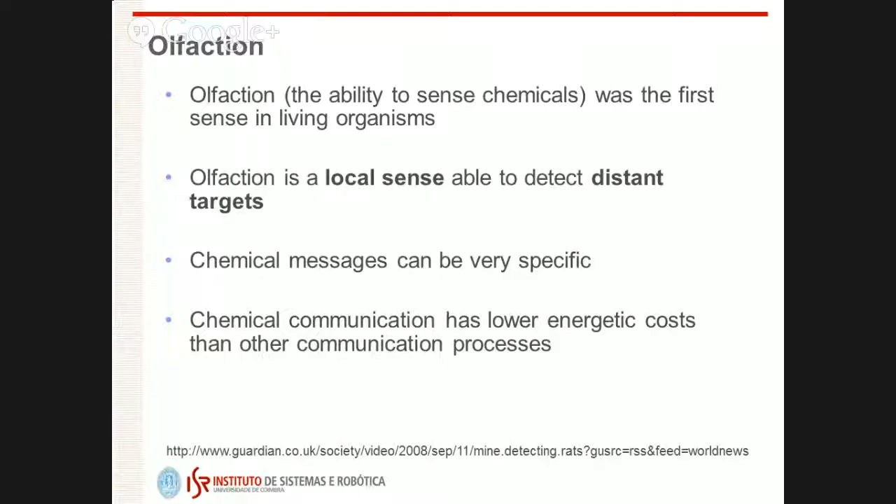Even in mating, usually the female generates some kind of pheromone to attract other animals from the same species in order to get together. In fact, chemical communication is one of the least energetically expensive processes to communicate in the animal world. We humans communicate a lot using voice, using sounds, but most animals don't use sounds to communicate. So a lot of communication is made by sending chemical messages.

Thinking about again, or focusing again on why use robots with olfaction. If we think about how humans use other animals to help them in terms of olfaction, everybody has passed through an airport and has seen dogs smelling and so on. The fact is that our sense of smell is not so well developed nowadays because we evolved in a different direction. We don't rely so much on the sense of smell right now. But when we need advanced smelling capabilities, we frequently use other animals that can somehow help us. Using dogs, that's an example.

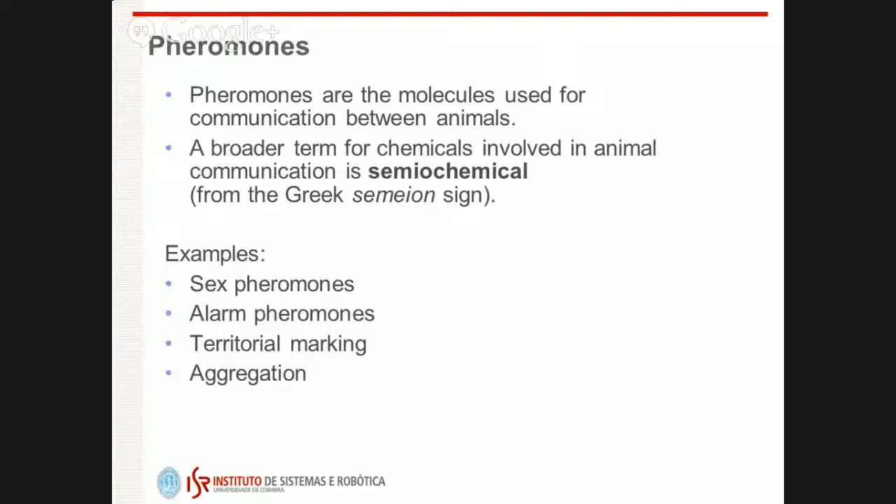So, thinking about some details about olfaction, something that probably some of you never heard about are pheromones. Pheromones are chemicals that are used by a species to send messages to individuals of the same species. There are sex pheromones, alarm pheromones, territorial marking pheromones, pheromones used for aggregation, and so on. So there are a lot of different types of pheromones. We can see some examples using pheromones.

For instance, a female moth releases some pheromones that are transported by the wind and eventually captured by a male that tries to follow the plume generated by the released pheromones in order to reach the female. This silkworm moth species is a very well studied species in terms of mobile robotics olfaction and olfaction in general. In fact, the first pheromone to be synthesized was one from this silkworm moth in the late 50s.

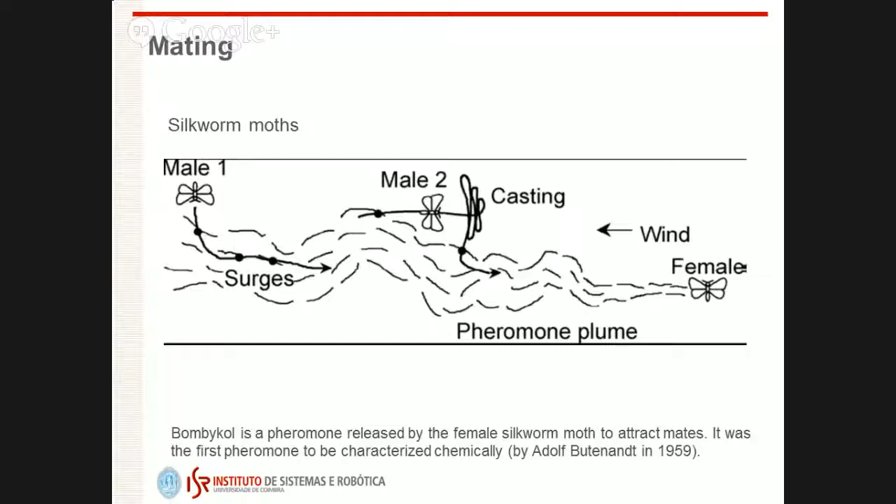And also the behavior of these moths, how they manage to reach the female, in terms of algorithmic aspects, has been a topic of intensive research during past years, because it is reported that the male may detect a female at more than 1 kilometer away. If you think about the size of a moth, and the quantity of molecules that are released, it's really impressive how it is possible to sense those molecules and track a plume for more than 1 kilometer. 1 kilometer, you use miles, that's okay. In fact, literature reports 1.4, so it's almost 1 mile. That's really impressive.

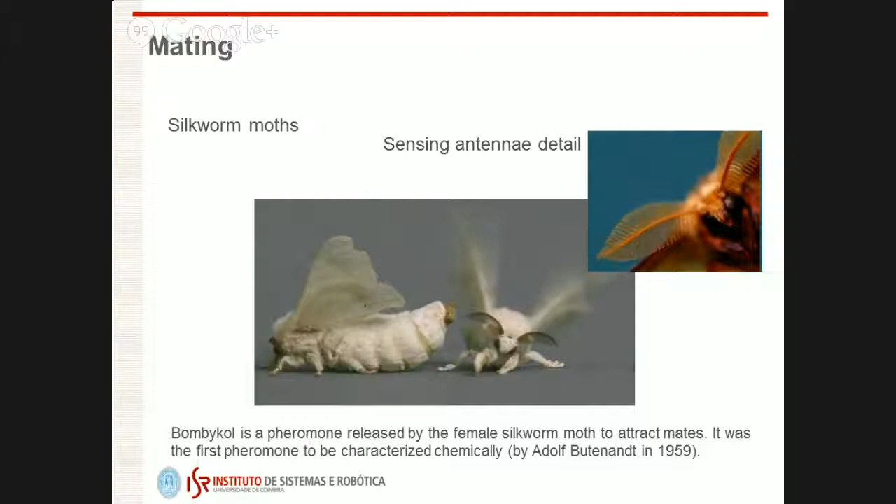Those silkworm moths have this shape, and they sense the pheromones using these antennas. Here we can see a close-up of these antennas, and it is claimed that the filaments of those antennas are able to sense even 1 molecule of pheromone. So if 1 molecule passes through, it can be detected, which is really, really impressive. There are no artificial systems that can do that right now.

There are also a lot of animals that use olfaction to search for food. Actually, most animals use olfaction to search for food. What we can see here are images from a study done in Berkeley some years ago, where the behavior of a dog was tracked with LEDs. Here, I don't remember the name of this bird, but this bird was releasing a scent, and the dog was somehow tracking that scent. And what we can see is that although the scent is transported in a more or less linear way, the dogs employ a strategy to track that scent, allowing for some robustness if the scent goes away.

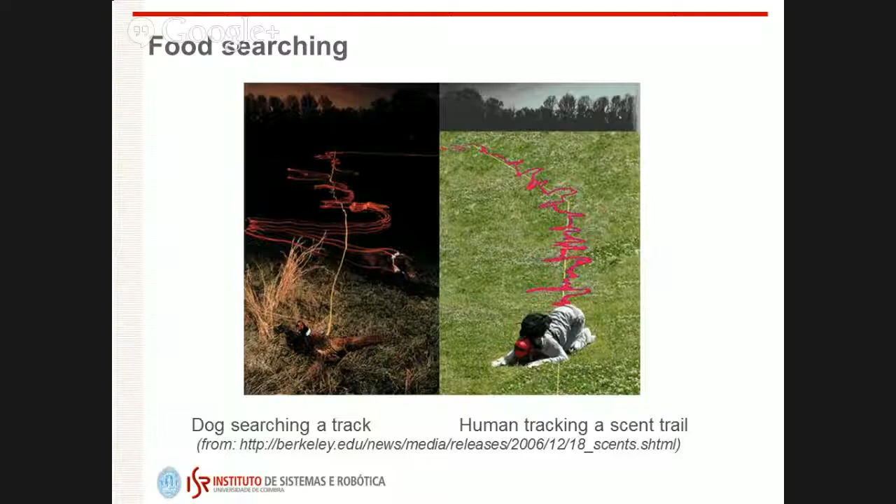What was done was comparing the behavior of a dog in this study with the behavior of a human. In that experiment, I think a chocolate scent track was laid on the ground, and a group of persons with their eyes covered were asked to try to track the scent. And what was impressive was that persons who are not trained to track scents employed more or less similar strategies. It's a strategy where the person or the animal accounts for the possibility of losing the track, a kind of differential tracking strategy in order to not lose the track.

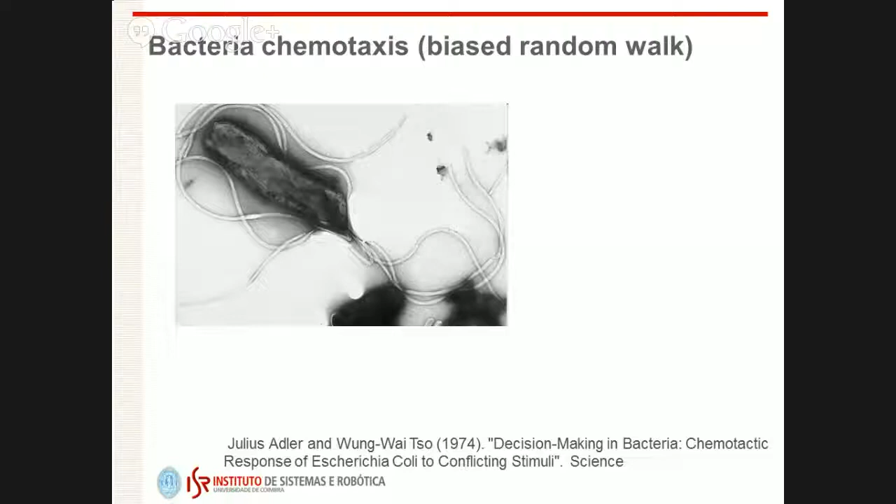Another very well-known example in terms of chemical-related behaviors are bacteria in general. In the 70s, a lot of studies were done with E. coli and other bacteria, and it was concluded that those bacteria could follow a chemical gradient using a very basic algorithm that was called biased random walk.

The idea of the algorithm was basically that the bacterium stores the previous chemical concentration measured and does a move. If after this move the chemical concentration increased, the next move will be more or less in the same direction. If it decreased, the bacterium performs what's called a tumble, so it goes somewhat randomly, but in the reverse direction.

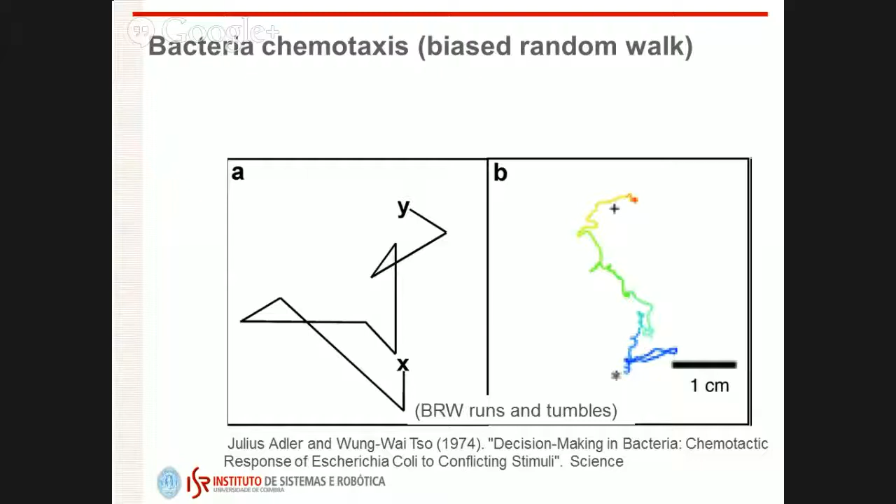What can be proved is that this type of biased random walk somehow allows to follow gradients with this very basic algorithm that only requires one memory cell, let's say. So it only requires storing the previous concentration value and knowing more or less the direction of motion, or at least knowing that I'm moving either in the prior direction or in a different direction from the prior one.

Okay, I'll try to move a bit faster.

Another example of animals using scents are bees. Bees, as you know, visit flowers for pollen. So in order to optimize this process, when a bee visits a flower, she marks the flower with a scent to know that that flower was recently visited. As you know, scents evaporate, so in time they disappear. If another bee visits that flower, it immediately detects that the flower was recently visited, so it goes away because that flower has no pollen.

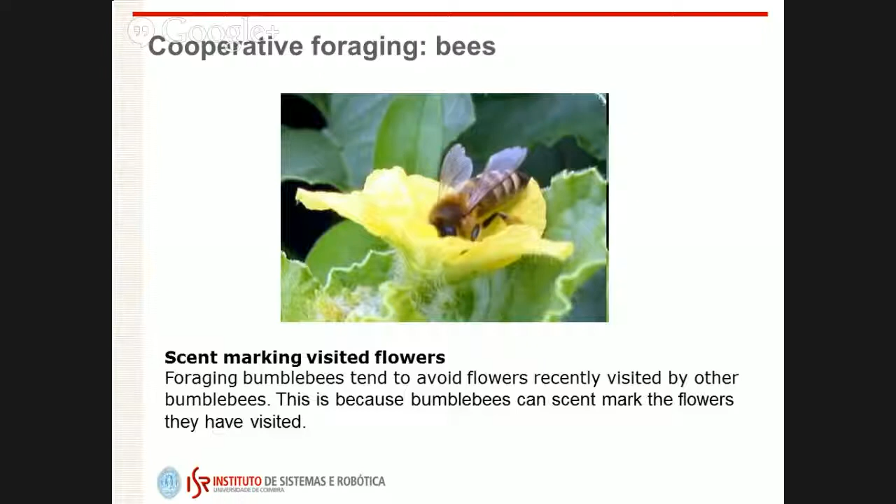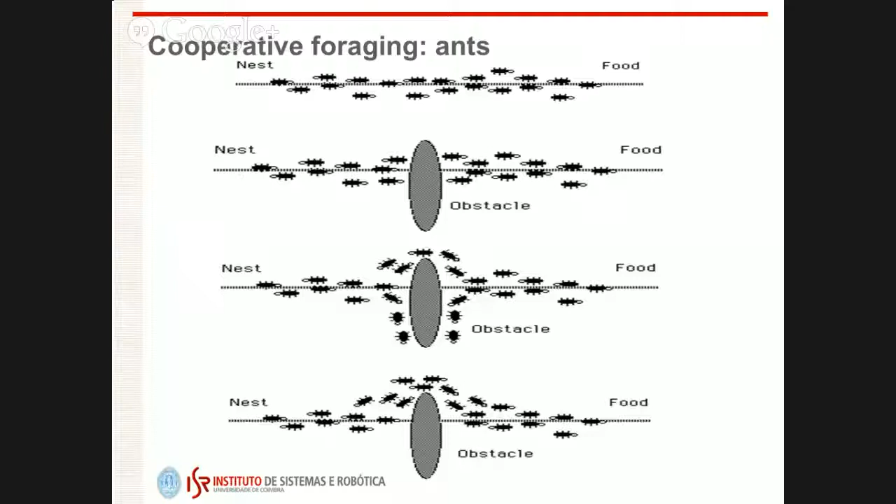The mark released there disappears with time, and when the mark has disappeared, the flower contains pollen again, so that's a kind of distributed optimization process that emerged from this use of odors. Ants are well known to use scents for a lot of their tasks, including to mark trails and to optimize trails from a given origin to the target.

Scents are also used, for instance, by territorial animals to mark the territory. That's also a way of distributed coordination among communities, in this case to manage competition among the animals of the same species.

So after this number of examples, let's try to wrap up what we have seen and think about, in terms of robotics, what can we use scents for? In summary, we can use scents either to go to a scent source or to avoid that source. Actually, there was a Greek philosopher, Plato, who claimed that there are two types of scents: the attractive ones and the unattractive ones. If we stick to that, we can think of using scents in robots either to let the robots find a given source of the scent, or to avoid it.

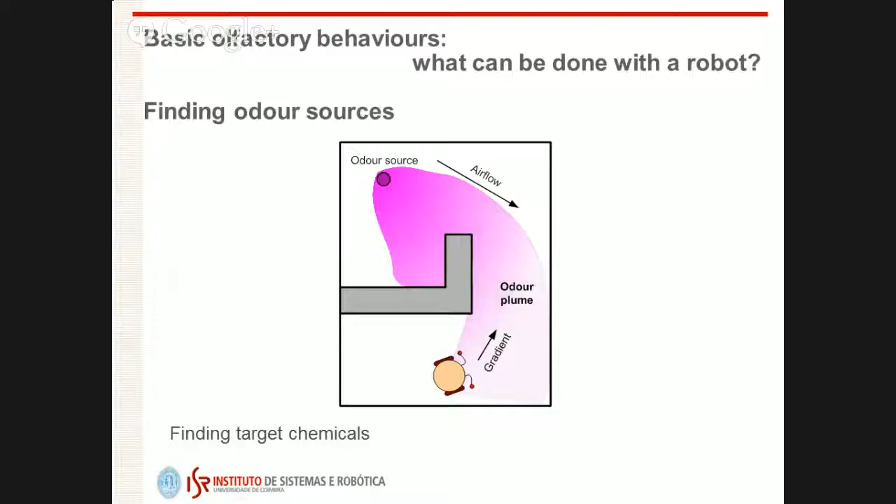We can use scents, for instance, to coordinate robots along trails. So instead of using localization and so on, we can just mark the trail. For instance, if we have a patrolling task, imagine that we want to patrol this building with a group of robots. If the robots mark the places where they have been with a volatile scent, when another robot passes in a given area, like with the bees, the robot knows whether that area was recently visited or not.

So if it was not recently visited, that's a self-coordination mechanism that may be used to have distributed patrolling without a centralized mechanism to coordinate that patrolling, or to transport things along trails. That's another example. Or we can think in terms of repulsive smell.

Imagine that we want to clean a large area, let's say an airport, using groups of robots. If the robots can smell the cleaned area by the chemicals released, and find the not so recently cleaned area, that's a mechanism again that can be used for automatic coverage without any kind of localization and so on.

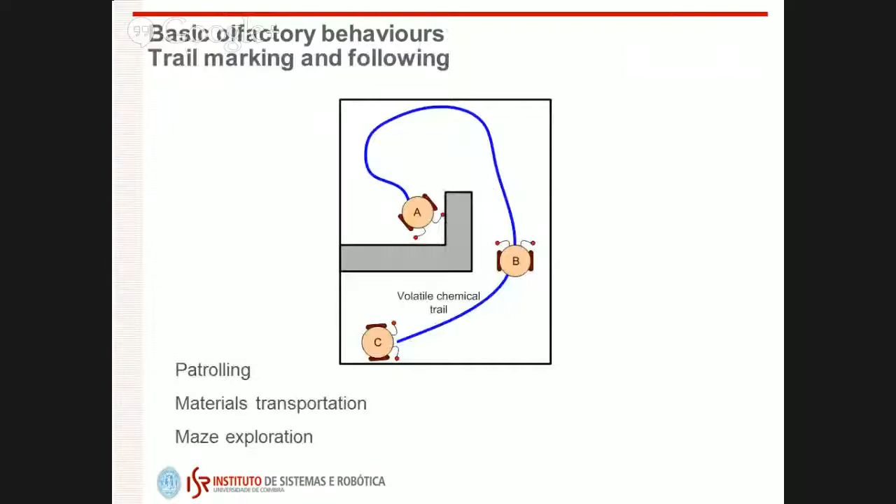So I'm assuming that everybody knows a bit about robotics. I don't know if you are aware that one of the problems in robotics is that robots usually need to self-localize. A basic problem in robotics is the navigation problem, how to move from one point to another point. And so those things try, using smell, to address those problems, but in a non-conventional way.

Okay, to use smell in robots in an effective way, we need to know deeply how odors are transported, if we think of the atmosphere, by the atmosphere. Basically, we can think of two mediums, either atmosphere or aquatic mediums. So let's not complicate too much and focus just on the atmosphere. As you can see from this cigar releasing smoke, the mechanisms of odor transport are not easy mechanisms.

Smoke from the cigar, it's not a smooth plume. It's a very turbulent one that has some laminar regime here, and immediately starts bursting, and we'll have areas with very different concentrations. In fact, if we think of another patch in what's called a low Reynolds environment, so something very viscous, the main phenomenon that happens with that concentration is spreading slowly, in a diffusion-only manner, and this would generate smooth gradients.

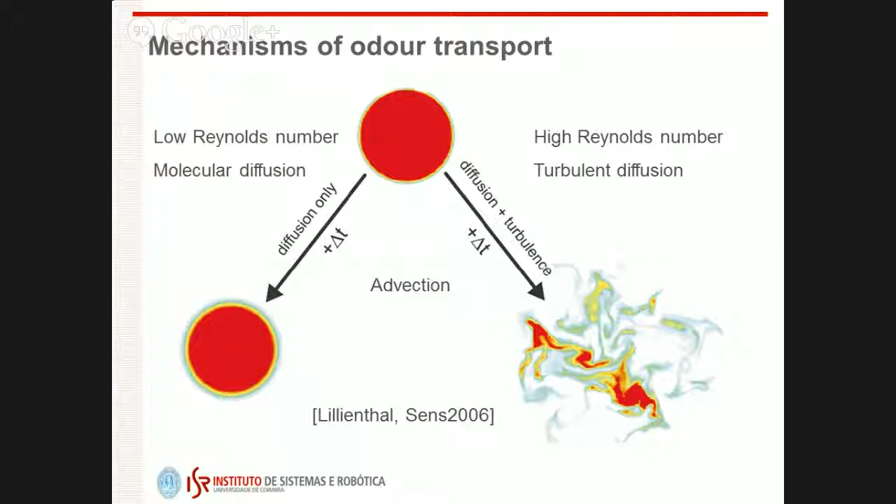So this difficulty makes dealing with odors and smells very hard. Let's try to analyze what is called an odor plume: the release of a chemical that is transported by the wind. If we look at the average of that phenomenon, that average can be modeled by what's called a Gaussian plume that provides this smooth pattern in terms of concentration.

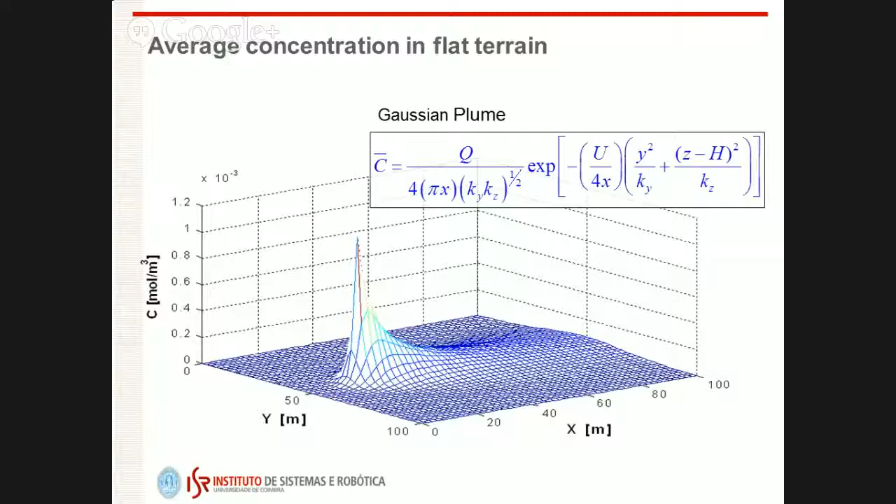But I'm saying again that smooth concentration is an average. So imagine that you have a gas release or a chimney that's releasing some chemicals. What that represents is, for instance, a half-hour average of what happened there, not the instantaneous phenomenon. If we try to look at a not so long-term scale, we'll obtain something like this. Imagine that you are above the plume looking at it. The wind generates that kind of fluctuation that represents the plume better, but doesn't represent everything yet.

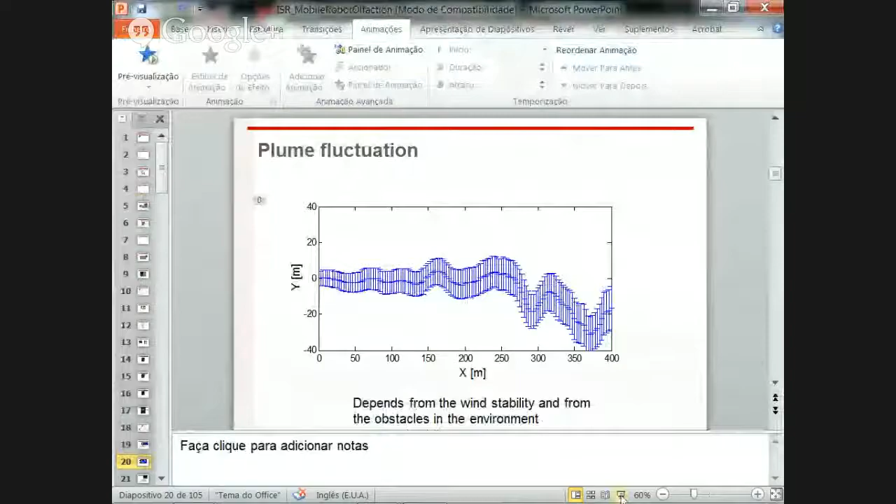If we really want to go into detail, the inside of the plume is very, very complex, and this is bad, but it's also good. It's bad because the phenomenon is very complex. It's also good. I don't know if you guess why. Why do you think it's also good? I'll tell you. It has to do with that average, and with why the male moth is able to detect the female 1 kilometer away or so.

The point is, due to turbulent diffusion, inside the ever smaller patches of odor, the concentration is more or less similar to the concentration at the release point. We are shredding and shredding those patches. So this is good because if I sense, for instance, here, I'll obtain a very high concentration, and so the probability of detecting that molecule is high, even far away. But because of its nature, it's almost chaotic, and so we have to deal with that.

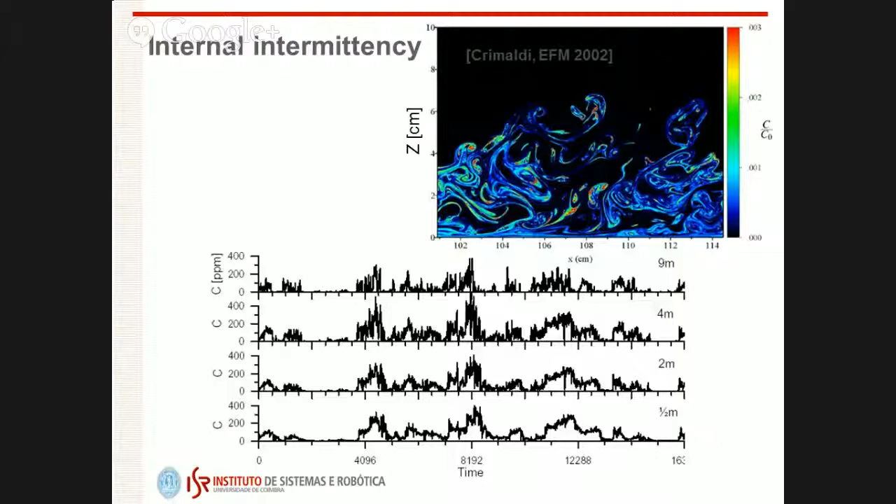So the trick that we would like to explore is exploiting concentration peaks instead of the average, because this phenomenon on average may be almost zero, but it's reported that the peaks might be 3 orders of magnitude higher than the average.

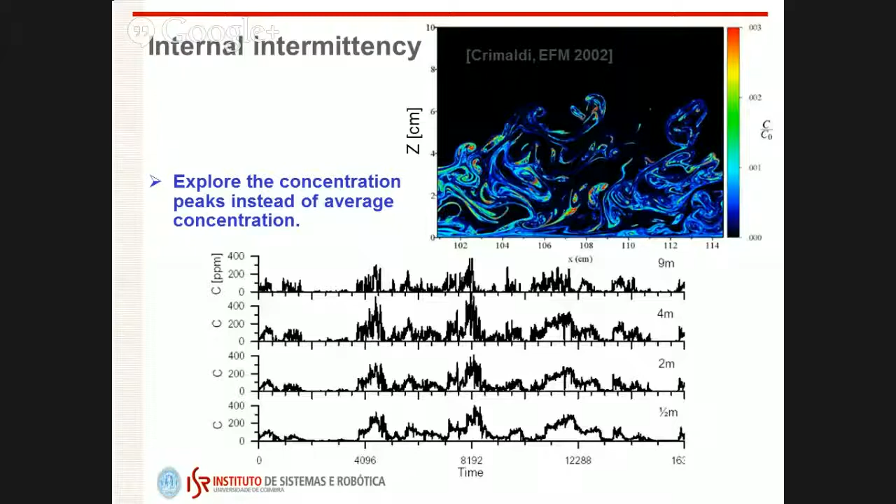So I'll go very, very fast on these artificial olfactory systems, since mostly being computer science it makes no sense to go into detail about technologies, but there are a lot of technologies to sense gases. The ones mostly used in robotics are the second one there, metal oxide gas sensors. Those metal oxide gas sensors are resistors that change their resistance in the presence of a given chemical.

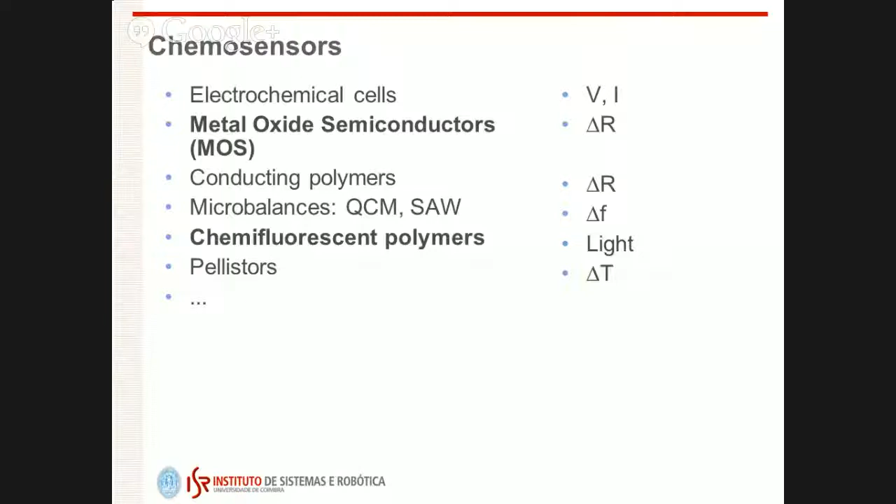So I won't go into details with this, but you are okay. If you have interest, please, let's try to not be a one-way talk. I'm happy to be interrupted, and let's try to interact if you need. Okay, so if you are curious about details of gas sensors, I can say a bit about that.

Okay, gas sensors have several problems. One is that they are not as selective as the biological ones.

I told you about pheromones and chemical messages. In fact, in biology, animals are very, very selective in terms of sensing. They know exactly that type of molecule: it's a pheromone from my species, no doubt. In artificial systems, that usually doesn't happen. Almost all of those chemical sensing technologies that were reported or presented before are selective to a given chemical, but also to a lot of other chemicals more or less similar.

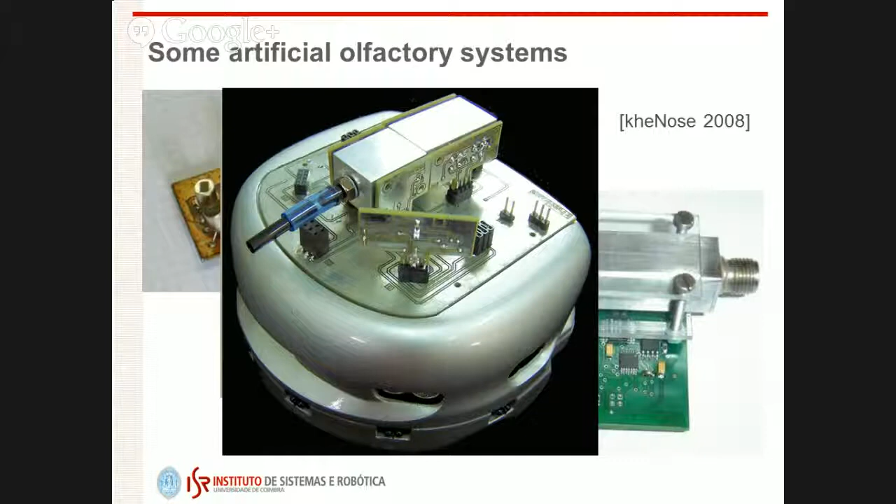As you can imagine, it's not only important to identify the smell. If we want to do something using smells on robots, what do you think is also fundamental? Sorry? To emit a smell? To give off a smell? That is important, yes, depending on what you're doing, for some. But I mean about combining the sense of smell.

In fact, let's say that you sense smoke, how do you search for that smoke? Okay, smoke is visible, maybe it's not a good example. Perfume. If you have two noses, you're trying to locate the source, right? Exactly, which one is getting it. That would be the obvious approach that I did a long time ago, and it's not very good. And that's why we have two nostrils, right?

I'm not so sure about that. In fact, we are symmetrical animals. We have two eyes, and we can benefit from the two eyes in terms of stereo and so on. From the two nostrils, I'm not sure that we can benefit in terms of stereo. In fact, probably I would go upwind. I would try to know where the wind is coming from and go there, because I know that smell is transported by the wind.

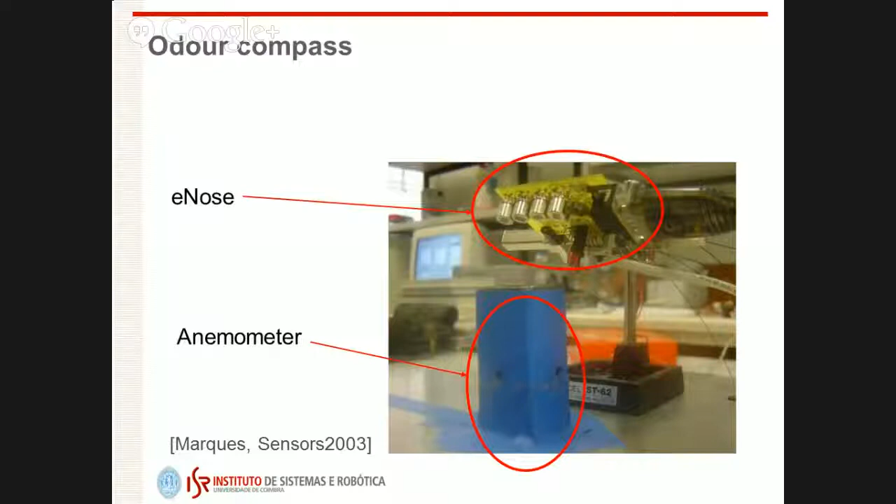We have two nostrils, but it might be just because we evolved as symmetrical animals, or it's more robust: if for some reason you lack one nostril, the other one might be working. I don't know. But the fact is that using only the nose, or exploring stereo from the nose, is really, really hard, if working at all. The point is we realized that we need to combine also the sense of wind. We need to know where the wind is coming from and combine both types of information in order to have some kind of useful output.

So some years ago we combined both. This is what is called an odour compass, something that is able to classify odors and know also where the odors are coming from. This is an experiment with a ventilator with a cup with a volatile in front of it, another white ventilator on the top of the lab, and the system in the middle. The experiment consists in turning on one ventilator with a chemical, and the system identifying which chemical and direction, then switching off, switching on the other one, and being able to discriminate odors and where they were coming from.

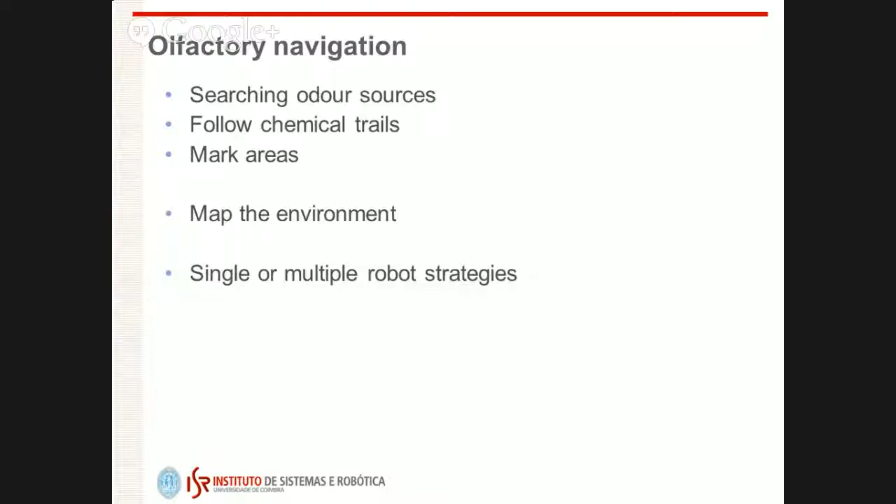Okay, this is an overview of the possible navigation tasks that we may explore. There are several possible tasks that I already mentioned, like searching for odor sources, following chemical trails, marking areas, mapping an environment, and so on. And we can explore this with a single robot or in multi-robot environments. One of the reasons why I'm interested in using smell is also to explore coordination strategies, so multi-robot environments coordinated somehow by smell.

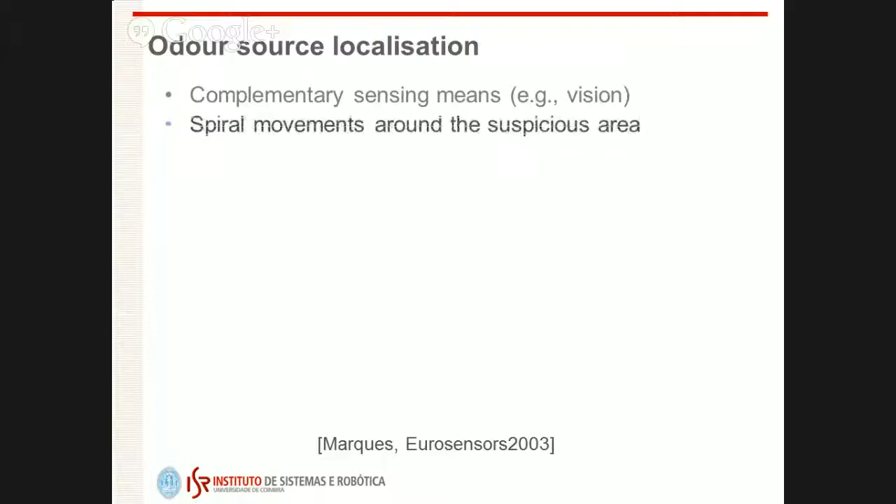So let's see something about odor source localization. So if I want to search for an odor source, basically we can say that I need to do three things. First one is detecting the chemical. If I'm looking for an odor source, let's suppose that I'm looking for fire in this building, first I need to get some signs of smoke. So as far as there are no signs, I should keep looking. So this is basically the first task related with this mission, and the goal here is getting into contact with the molecules that we are looking for.

The second: let's assume that in a given corridor I smelled some smoke. What I need to do is track that smoke scent until its source. So that's the most obvious thing to do. And to do that, I need to do what is called plume tracking. And let's assume instead of smoke, that's a non-visible chemical, let's say benzene or propane. So that's a non-visible chemical that we can sense. So that gas that is used to cook, for instance, we can sense and it's not visible.

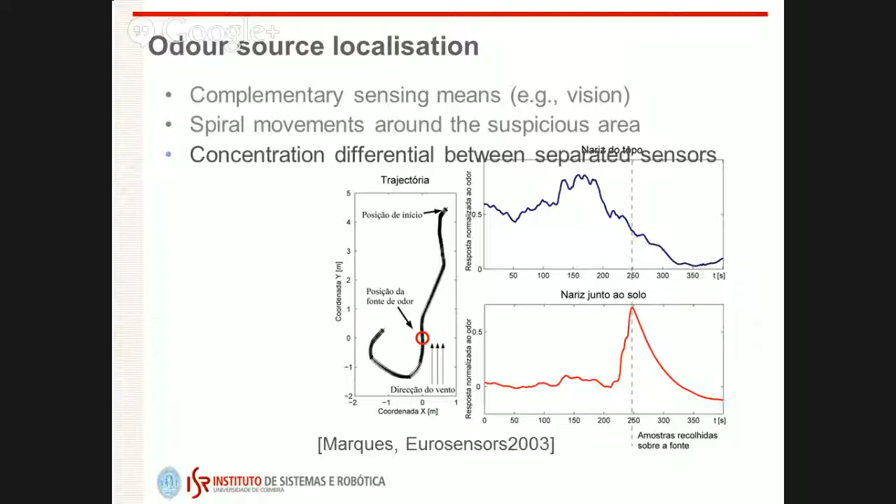That's a possible strategy. Right now, we use other strategies that are not here, but I can show a video, based on the estimation of the divergence. So if I can somehow estimate the divergence of the concentration, I can conclude where a source can be. So, some algorithms for plume tracking. Do you still remember the bacteria and the Braitenberg vehicles? So some years ago, I tried several of those algorithms with the goal of trying to assess advantages and drawbacks of each one of those algorithms.

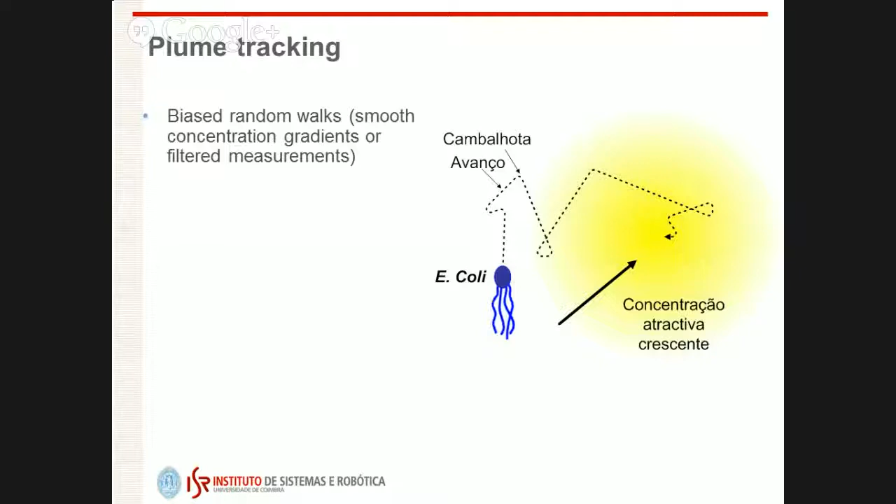So I tried bacteria, that was like a benchmarking algorithm, let's say the dumbest algorithm that we could implement on the robot. What seemed to be the cleverest algorithm was gradient following, so assuming two sensors on the robot, like that guy suggested, let's try to track the gradient and reach the source. I implemented also an algorithm inspired by the moth while searching for a plume. By the way, that algorithm is more or less like that.

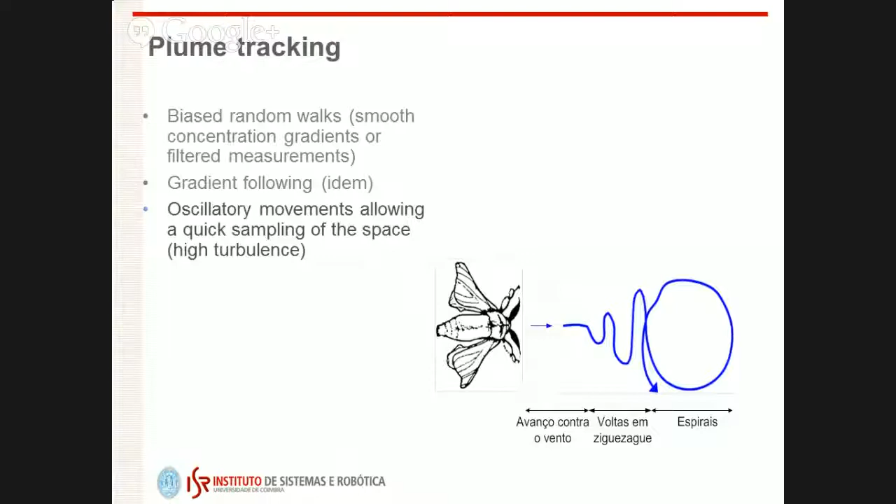When a moth detects some scent of interest, it goes upwind until eventually losing the detection. After losing the detection, it tries to recapture the detection, starting a zigzag strategy. If that zigzag strategy fails, it loops back, trying to recover the plume again. So that's a state machine-based algorithm. And we tried those three algorithms with that experiment, with two odor sources in an area where a lot of turbulence was generated, and with robots moving from here.

And in fact, in summary, what we could conclude was that in that environment, the most effective algorithm was in fact the one from the moth and not the gradient one. In the beginning, I was expecting the gradient to be the one performing better, but it was not. And some years of work later, it was clear, because in fact there are no smooth gradients; it's always jumping due to turbulence. So it's better to have a more robust strategy that somehow integrates the knowledge of the wind and so on than to assume that, okay, I have two gas sensors, let me try to follow a given gradient.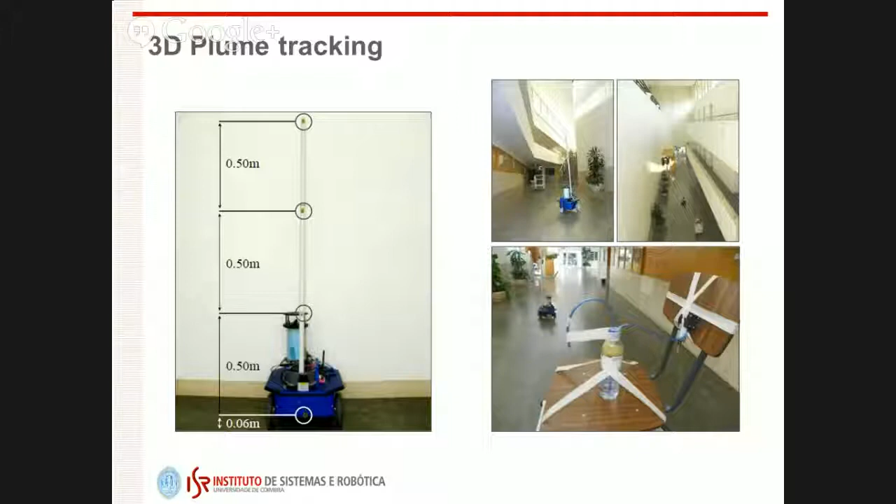We did also some work on 3D plume tracking, in this case with a robot equipped with a set of 4 gas sensors at different heights. And we did some mapping and some assessment on the performance of the different algorithms.

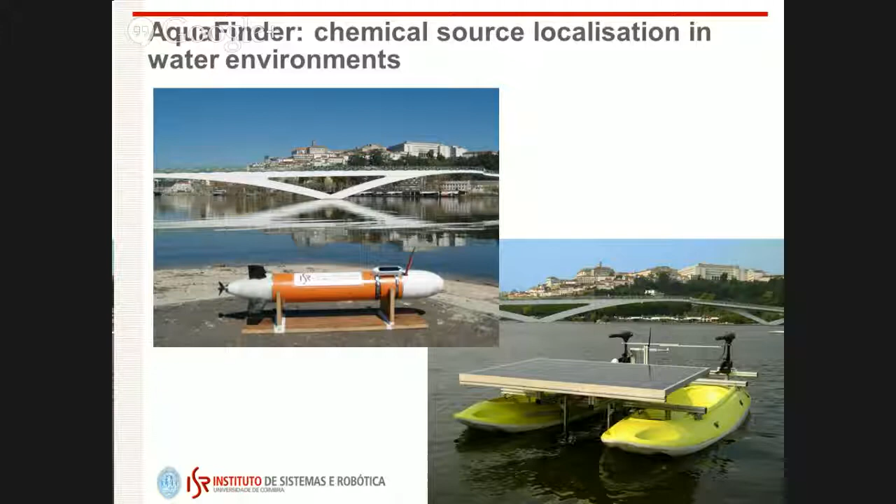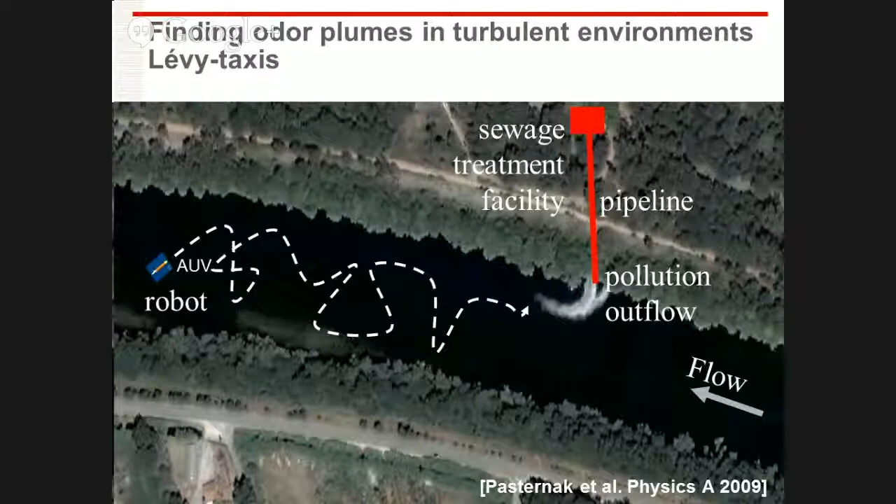In the past years, we have also expanded this type of algorithms to aquatic environments with a surface boat and an underwater platform. For instance, here of course we knew where the source was, but this was interesting because it was a set of experiments in a river passing in Coimbra, where we could also, again, get confirmation that that type of state-based algorithms perform much better than any kind of gradient-inspired strategies.

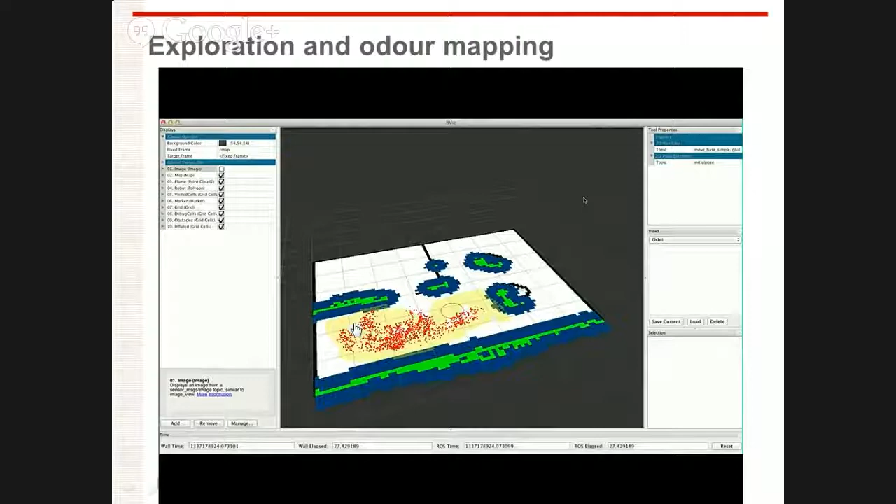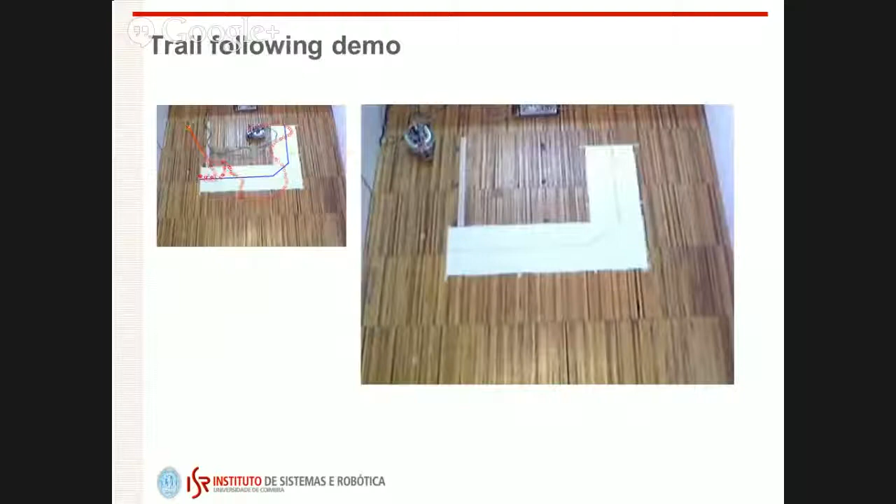These are some experiments related with exploration and odor mapping. But I will pass through since I have a video and the time is running out. Let me select what to show you.

So what we have here is a robot that releases cleaning chemical, and so while it passes, leaves a trail, and has the ability, as a nose, to sense if a place was recently cleaned or not. And we have also a human cleaner that is also releasing that type of chemical. And the algorithm managed to coordinate automatically the robot independently of the areas that the human cleaner cleans. But this could be expanded to multi-robots because the coordination was in the chemical release and chemical sensing, and not on any kind of centralized approach.

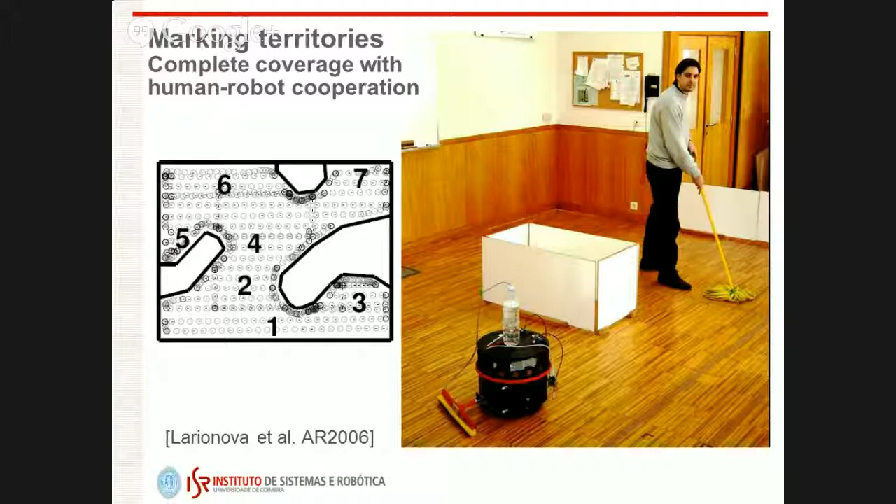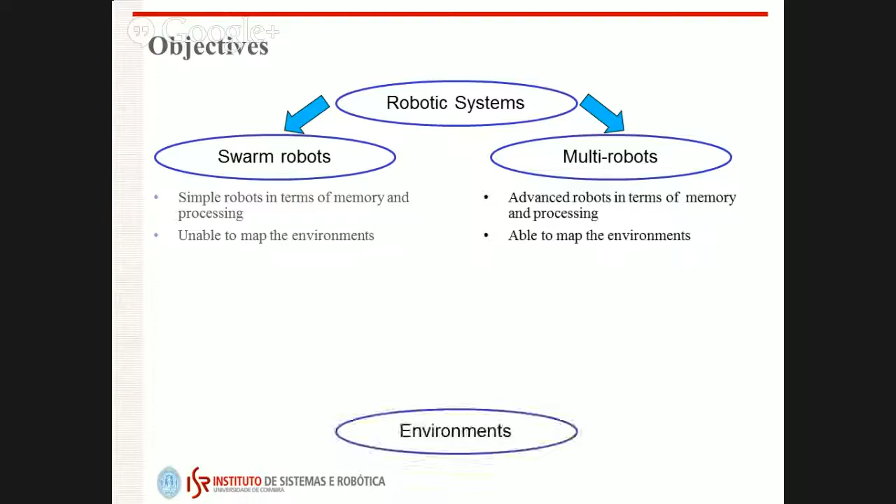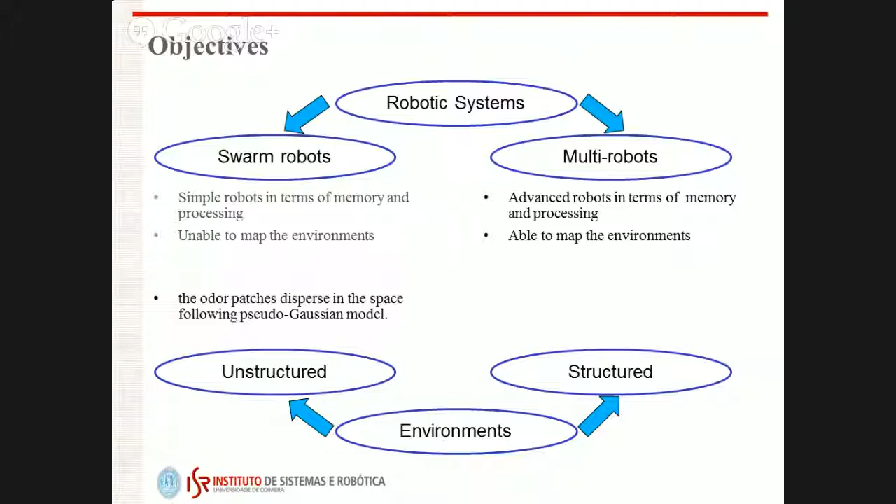Okay, in terms of multi-robot systems, we have done a lot of work using multiple robots in emergency scenarios. We tried to extract some knowledge about why and when to use swarms or multi-robot systems, and try to identify advantages of using swarms related to how structured the environment is or not. I will jump just to the movie. I have a movie summarizing this set of works.

Ali was one of my PhD students that is now in EPFL in Switzerland. For instance, this work is about using a swarm of robots to detect odor plumes. We have the odor plume there in yellow. We implemented swarming strategies that allowed, for instance, when a given agent detects the plume, to tell the neighboring agents that I'm in a good zone, and neighboring agents were attracted. And so if that proved to be a good sign, it reinforces and allows the swarm to go much faster tracking the plume. Otherwise, it disappears and they keep exploring.

And there were also some rules implemented in order to realize that the search was reaching the source. When they were black, they were searching. When they were red, they were in the plume or detecting chemicals. And when they turn blue, it means that they reached the source. It was clear from the motion, yes.

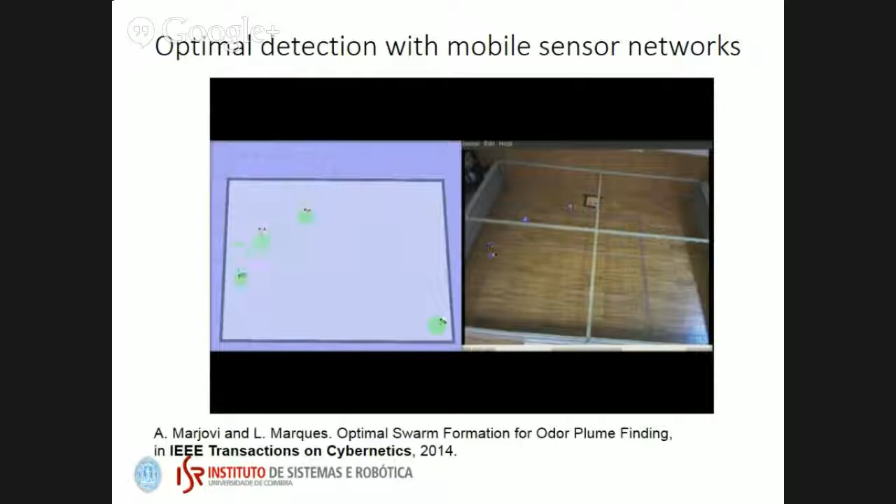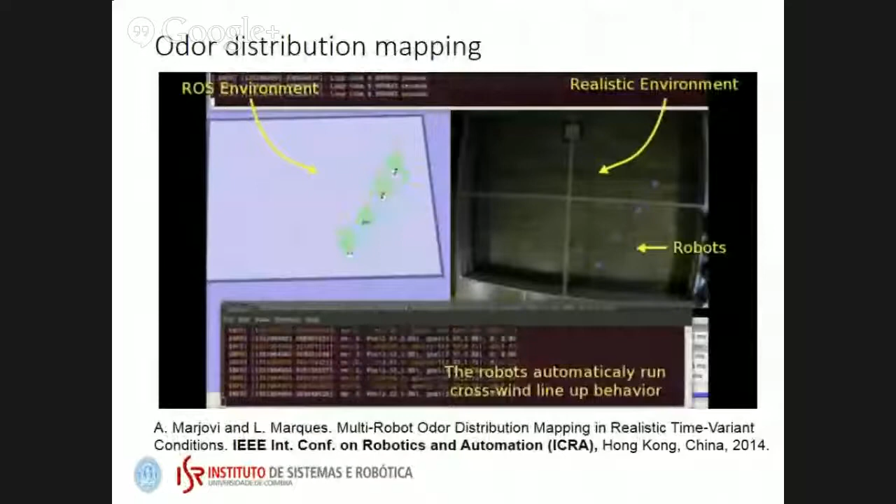So this is about how to explore an environment in order to optimally detect an odor plume. So imagine that you are searching here in Nebraska, it's quite a wide field, and you want to optimize the probability of detecting a given odor. Something is releasing an odor, you don't know where it is, you don't know where the plume is, how to distribute in the field in order to optimize the probability of getting into contact with that plume. My words are with a delay from the movie, I hope you can follow.

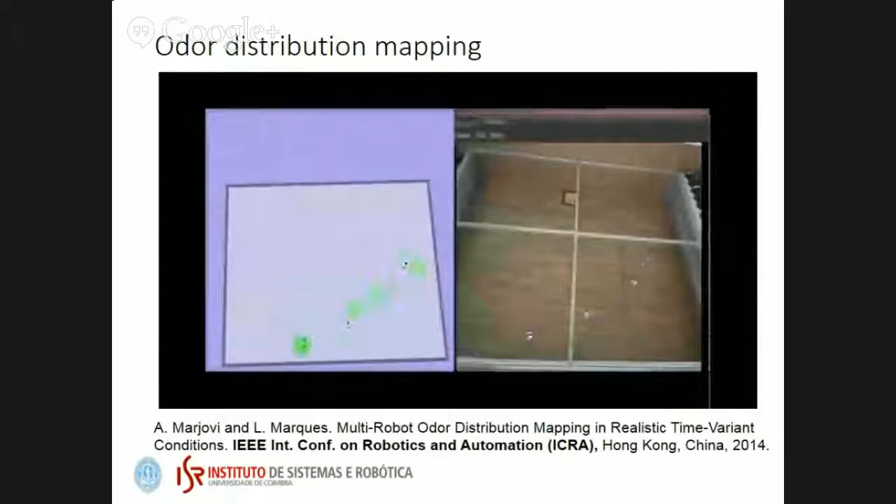This is taking some time.

And finally, this is work from 3 years ago or so that is in structured environments like a large warehouse or whatever. How to explore that warehouse with criteria that also optimize the detection of a gas source. So let's imagine that the warehouse has a fire. It's not a full fire, it's in the beginning, it's releasing some smoke. How to explore that warehouse in order to optimize the time to reach the odor source.

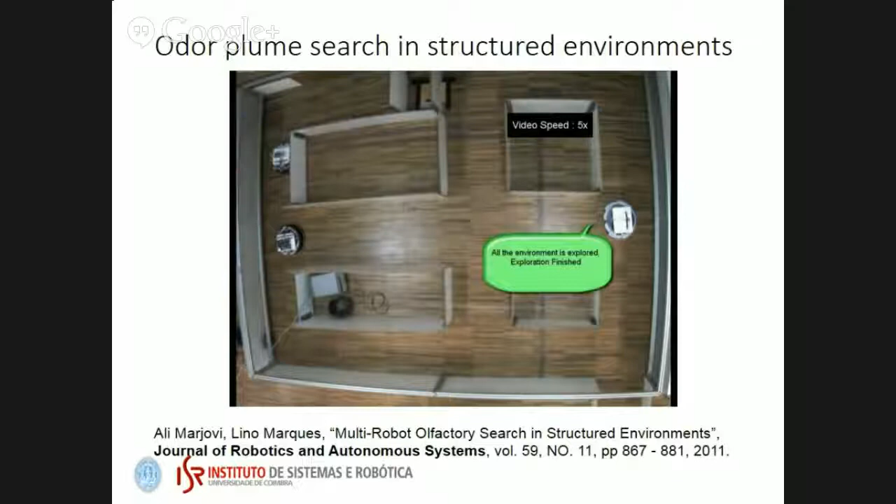So what we did here was to change the frontier exploration algorithm in order to take the sensed chemicals into account. So in the search that you showed, part of the robots went through? Yeah, in this case it was not a swarming approach, it was a multi-robot approach, so there was topological mapping and so on. So they have a map with them, they don't have a prior map, they are building a map and sharing the topological map. Because I saw one robot that explored the left branch. So that was multi-robots.

And that's why in all of these studies somehow we try to extract some knowledge about why and where to use swarms, and why and where to use multi-robot systems. So multi-robot in the sense of high processing and cognition ability. So they contain maps and so on, and exchange more or less complex information.

Your sensors, how do they not get burned out? Because in the initial one, you discover a low concentration, but as they get towards the source, doesn't the concentration get so high? How can they differentiate those concentrations? Well, if the concentration becomes so high, it saturates. It just saturates, so it means that you lose the ability of knowing that you are moving in a way that increases it. But usually what happens is the reverse with artificial systems. Our problem is the ability of detecting very low concentrations. So what happens is that you only start detecting when you are already at a certain level.

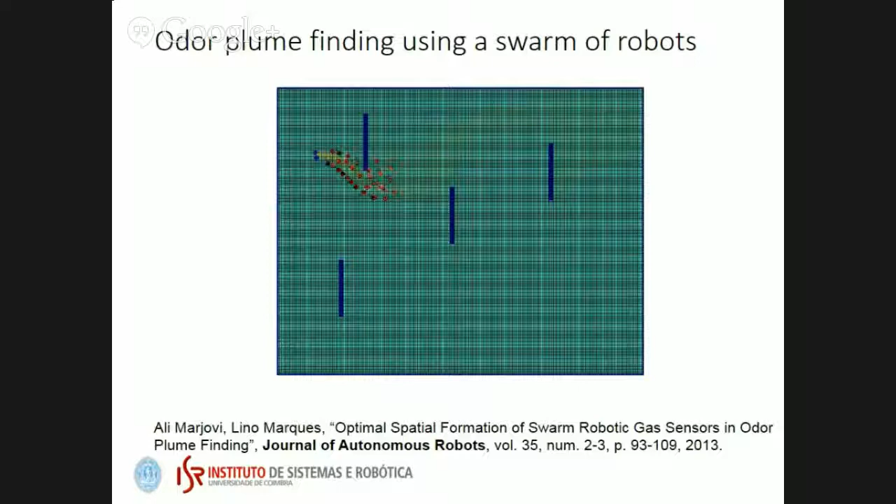So is the routing software something you have to program? Sorry? The routing software that allows you to route data. No. Usually we don't need to do that, because we are not dealing with the communication. Our deal with the communication is constraining what already exists, not developing new protocols. So the constraints imposed are imposed by us because we want to try a given aspect of the swarming approach, and we are not interested in exploring different communication protocols that are more or less adapted to that type of usage.

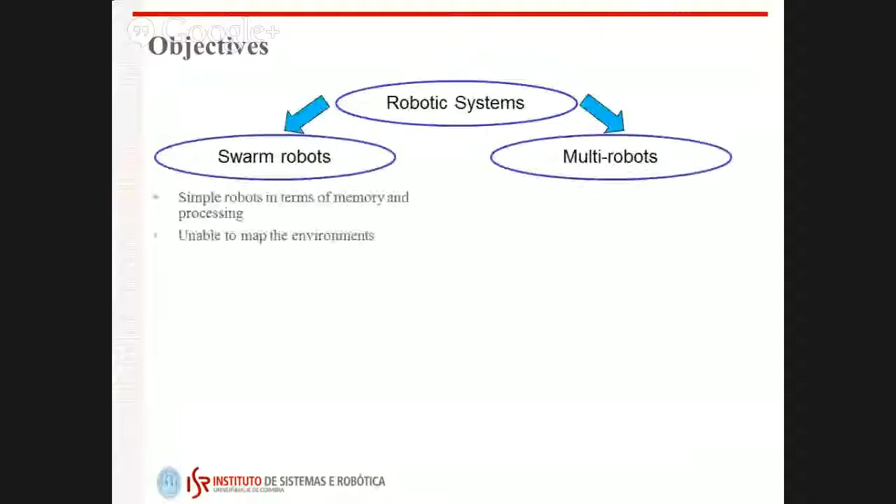I think we'll let you get done with the talk first, and then we'll take other questions. My question is about how to get the... After the talk. Because we are on one talk, we'll just let you finish the talk, and then we'll take questions, and then we'll talk. Okay. So you have some more slides to go through, right? I do, but I was assuming that it was okay too. Yeah. If you're at the end, then it's fine. I think it doesn't make much sense to go into a lot of details for all of this audience. You have some end comments to wrap up your talk, saying what the take-home for us should be, and then we can open up for questions.

Okay. Well, to wrap up, I would say that this is a not very much explored topic that I see myself working on in several years to come. I'm particularly interested in researching swarming aspects using chemical communication, and what we did is very little. When I say chemical communication, I don't mean communicating by radio frequency with neighboring robots. That's what we have done. I mean really using chemical marking to communicate with other robots. Even in terms of hardware, that's challenging, like developing robot ants. That's one of my goals in the near future.

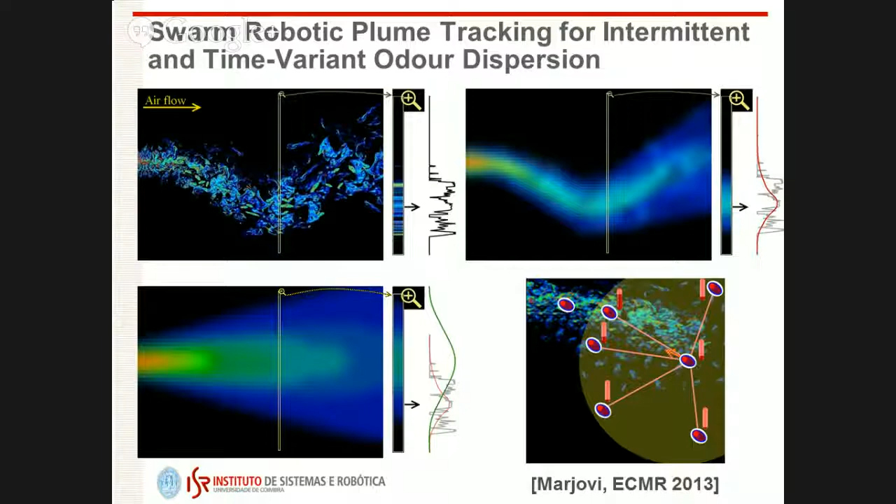That's exactly developing small robots with all the abilities. I passed through this very fast. Sometimes we do some kind of adaptations to existing robots. For instance, this one contained a nostril here, the vacuum pump, and we had another one that also contained the ability to track its way. But that's ugly. What I aim to do is something really adaptive to research in this field. So a robot really able to deploy different chemicals and to sense different chemicals, something very great and not something bad.

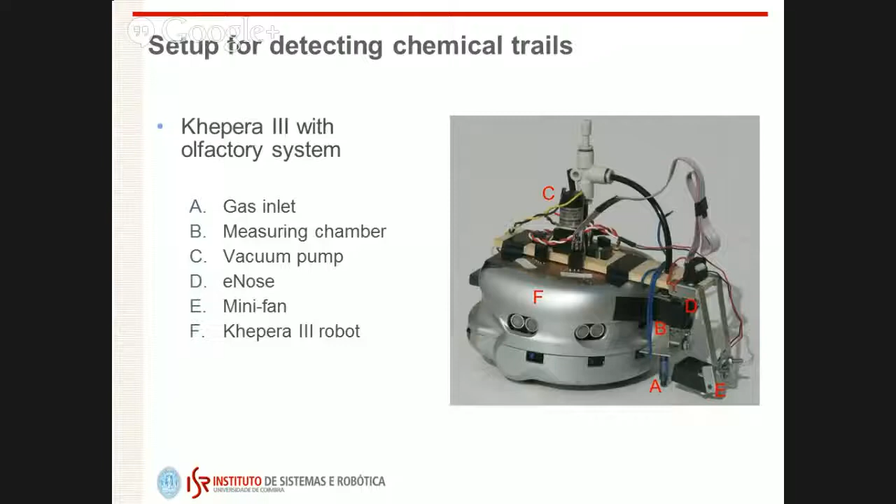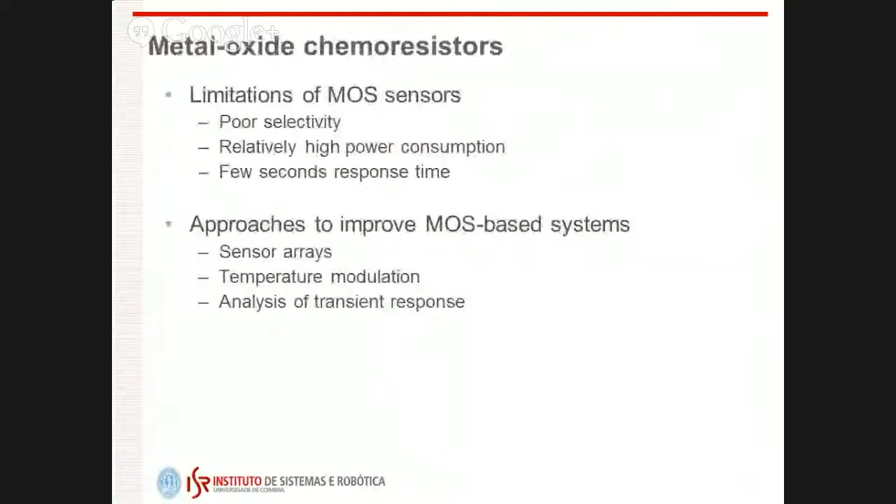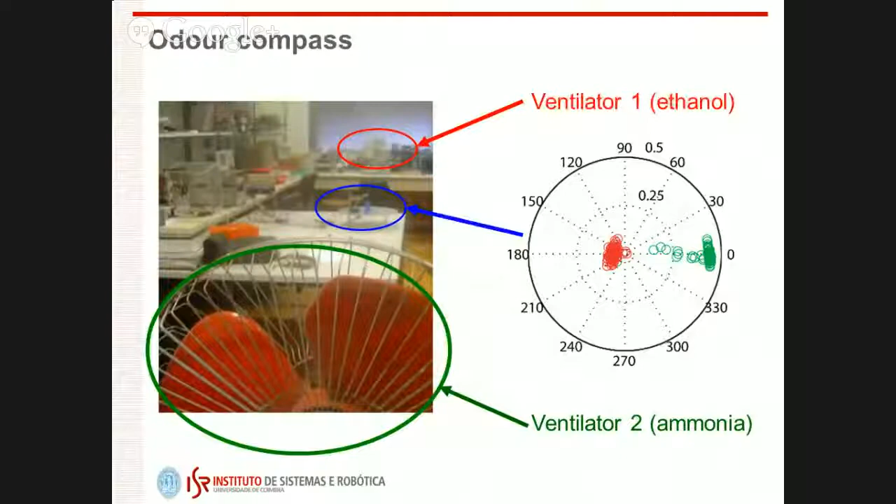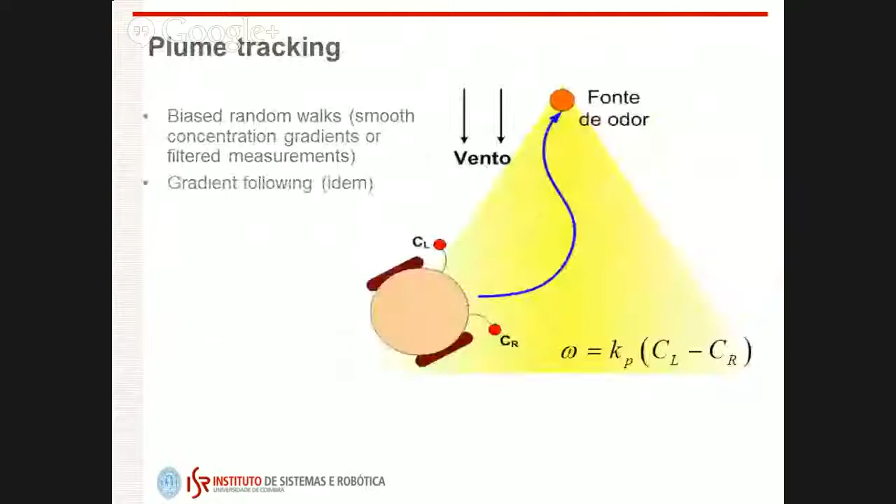My question is about having different chemicals, because this seems to be practical for one smell. What happens when you have millions of smells, and how do you implement that? Millions right now, you should forget, but some smells, for instance, this work. This was for two smells, for instance, and this robot was used here. This was also with two smells, methanol and ethanol, but mostly we try to use chemicals harmless to humans, that we can use in the lab.

And usually, those metal oxide gas sensors have a property. They only detect chemical volatiles that oxidize, that react with oxygen. It seems a limitation, but it's not so big, because almost all smells that we can smell are molecules that oxidize. So the number of things that oxidize is huge. But we try to use mostly harmless volatiles. And if we are interested in researching a plume tracking strategy, you don't need different chemicals. You are just interested in how to manage the plume. So you need to sense, and your algorithm needs above all to manage the plume.

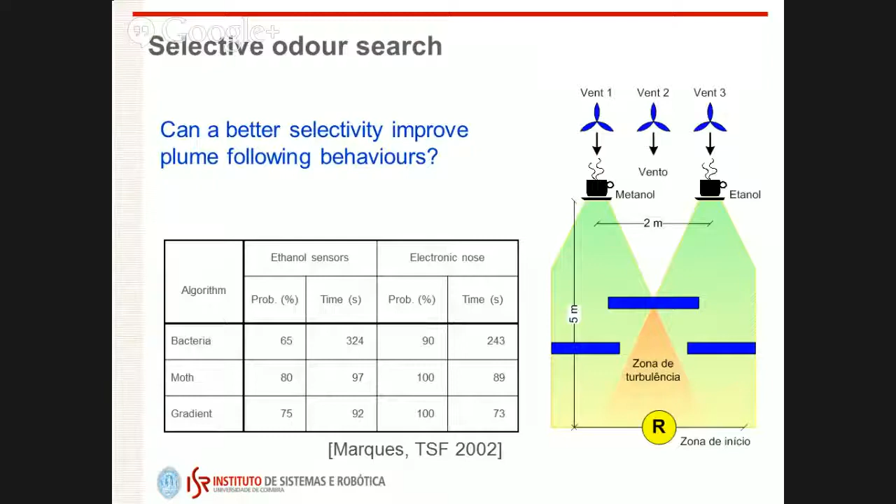So I was thinking during your talk about the benefits of odors for range detection of a source. Since they broadcast, there's a plume that goes out over a certain distance. Right now I've seen a lot of your sources are within 2x5 meter areas or 4x5 mostly. But what are your thoughts on the future of odors for detecting long range?

Well, first, for instance, here this is the hall of my department, and this is huge. In fact, it starts here, maybe 200 meters long. You cannot see it all in the picture, and a lot of meters high. But that's an interior environment anyway. So it'd be more like a local area, as opposed to infrared-marked things. We can shoot infrared light at it and it'll transmit to us the location miles away. So this is more like a localized area. Well, the reason for having worked mostly indoors so far is because indoors it's more convenient.

You can have a controlled environment and so on. But in fact, in this area, I have two main research goals right now. One is going outdoors, and we are working on that. And another one is exploring the swarming aspects in deeper detail using olfaction.

So going to outdoor robotics, that's not so far future, I would say. That's planned. In fact, one of the PhD topics of Gonçalo, one of the guys involved in the competition, is exactly that. But he has been working on other things lately, so it's on hold right now. But yeah.

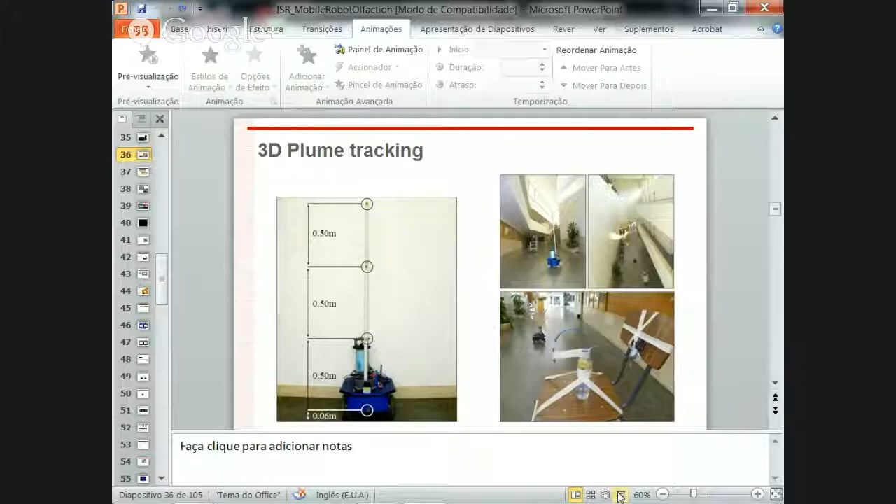I have a quick question about single robot plume tracking. In the algorithms you have, like the moth's flying behavior or the gradient descent algorithm, do you have any issue with the search getting stuck at a local optimum? It depends on your environment. Like in the scenario you showed, there was an odor source with a plume coming out and an L-shaped obstacle. That was just an example. If you do something like that, it might be a problem.

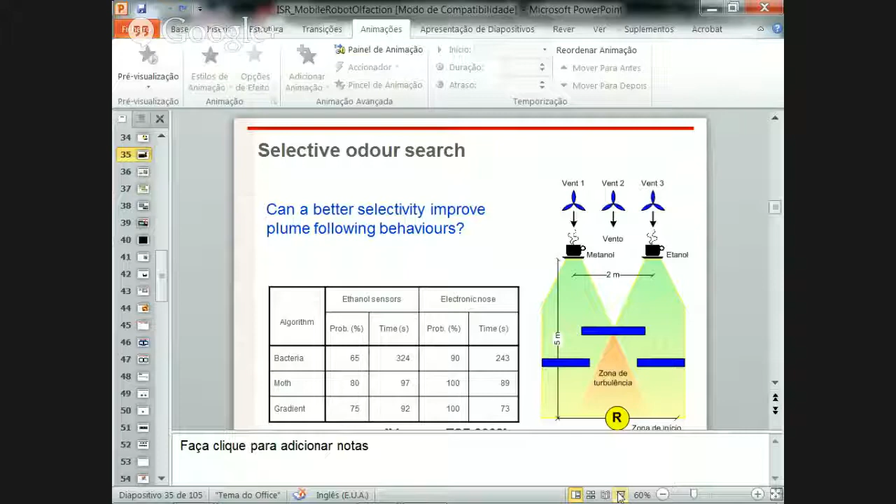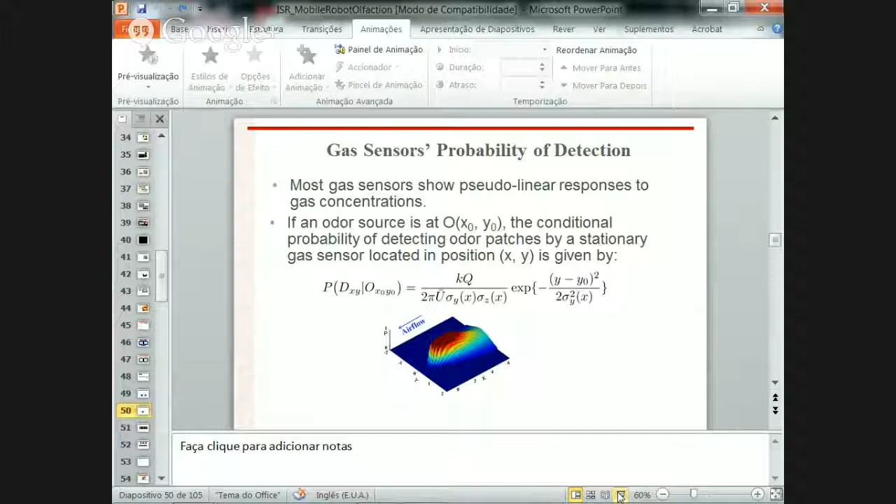Along those lines, do you use fluid physics to predict, like in the water scenario, that the plume in a river system is probably going to take this shape, so you need to search in that manner? Yeah, the slides I didn't present take that into account. You know the average of the plume, so you know how the shape statistically should be. If you want the probability of detection for a gas sensor, you should take that into account in order to optimize. Those papers about optimizing coverage or plume detection take that physics into account.

Any more questions? I have one more. Is this pretty much all ground-based robots at this point? Yeah, it's pretty much ground-based robots, although there are some works on water as well. I was more interested in drones. Actually, the outdoor work aims to use a ground-based robot. There are some works using drones to find gas sources and so on.

The problem is, if you are looking for a huge gas source, like places where you put garbage, methane coming out from the land, that's fine. You have a small drone and a 1 square kilometer land, a huge source, no problem. But if you are looking for something small, let's say a leaking gas bottle, the propellers of the drone will mix everything, so it doesn't make much sense to use a drone for fine detail.